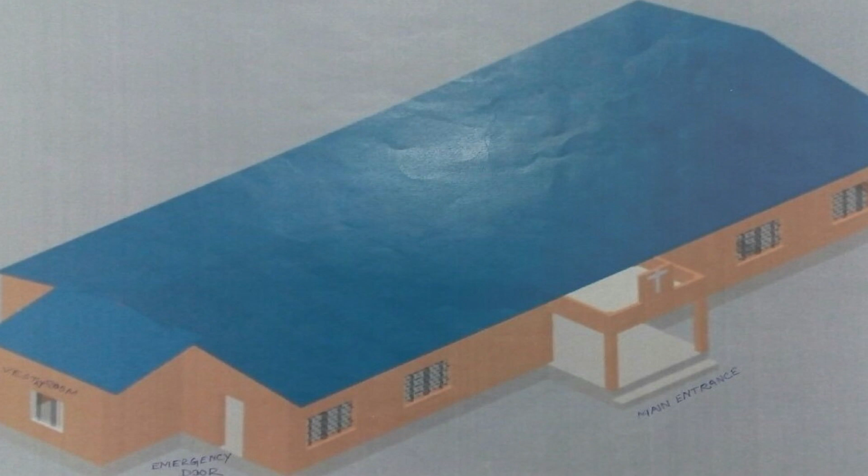Reverend Sebastian and the church secretary Shubhabroto Das came to my office with pictures of the church, a shed created in 1947 for a small congregation of 100 people. The congregation had now grown to 800 and the shed was crumbling apart. A visit to the site revealed that restoration was not feasible. They were keen on a new building and already had a drawing of a new shed, which they didn't want at all. Although it fit their size and budget requirements, they were not happy.

The budget for a church project is determined by the donation collected by its congregation. If the congregation collects 10 lakhs, the diocese can assist them with 30 lakhs more. And this budget of 40 lakhs is all they had for their proposed church, an area of 3,600 square feet in the final plan.

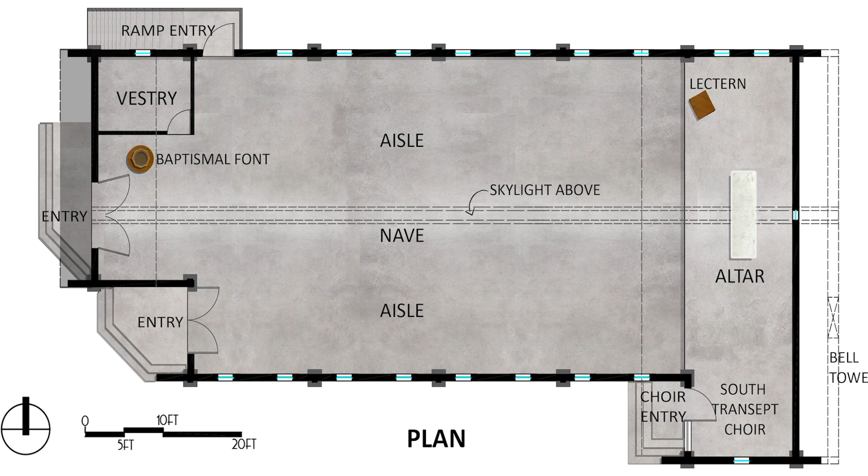The building was conceived in three parts: the entrance vestibule, which also housed the vestry and the baptismal font, the main congregational area, and the altar with a lectern and a south transept for the choir. These three parts were also reflected in the form of the building, which was designed as a series of slopes. These progressively rose from the west to the east.

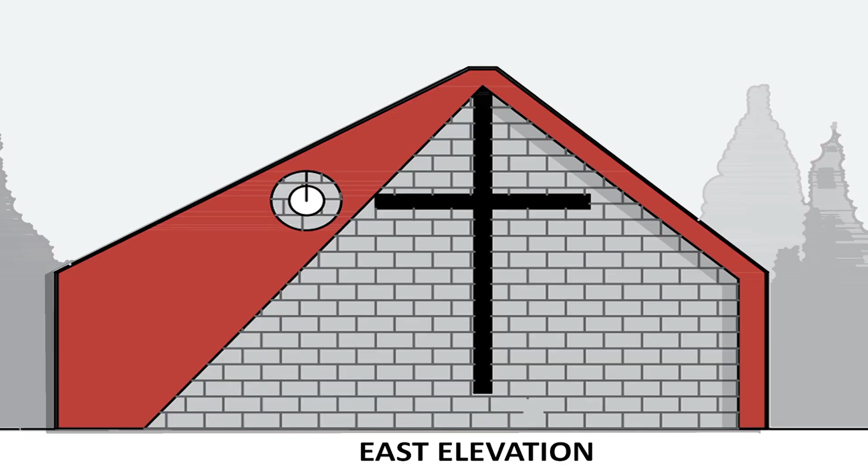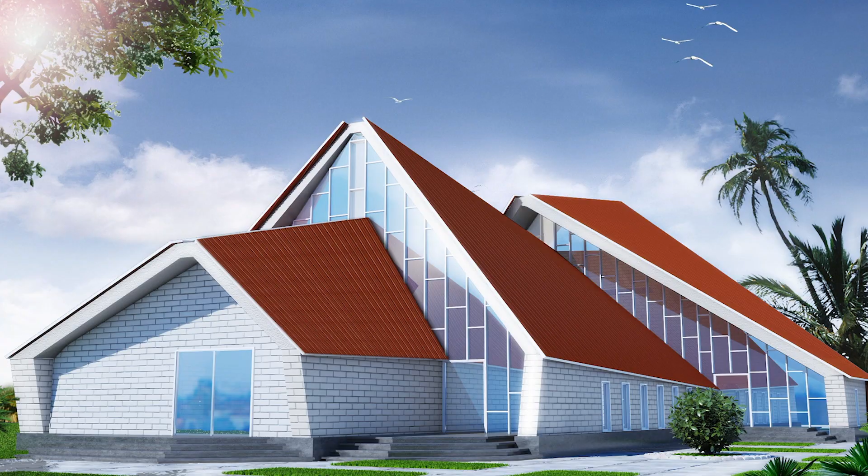The east end culminated in a large glass cross on the gable end to backlight the original crucifix at the altar. This was done to get the morning rays into the church, which was possible only because the east was totally open, being occupied by the Douglas Ground and the wide expanse of Diamond Harbour Road. Another reason for creating this angular roof structure was that these slopes would be visible from the overhead rail line in the future.

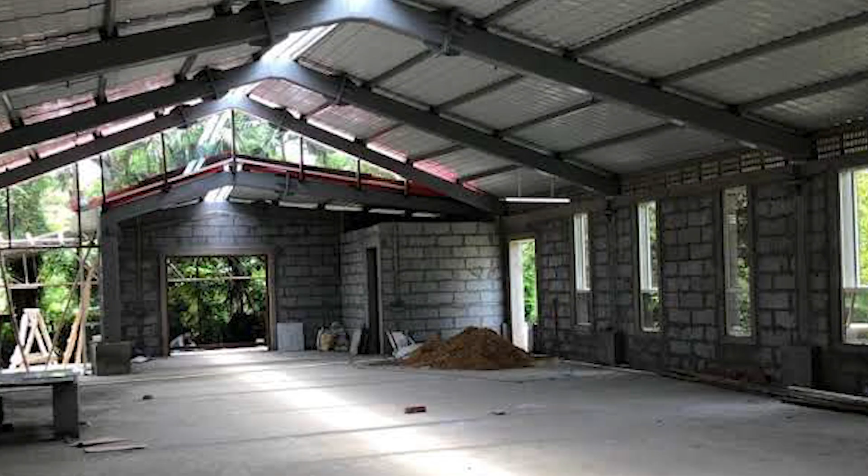In this design of a contemporary church building, we replaced the original bell tower with a niche in the gable wall so that it could house an electric bell. Now, the real challenge was to meet their aspirations within their budget. A steel structure was designed with a narrow skylight at the ridge of the roof. The height, span, and budget could only be met with steel and GI sheeting.

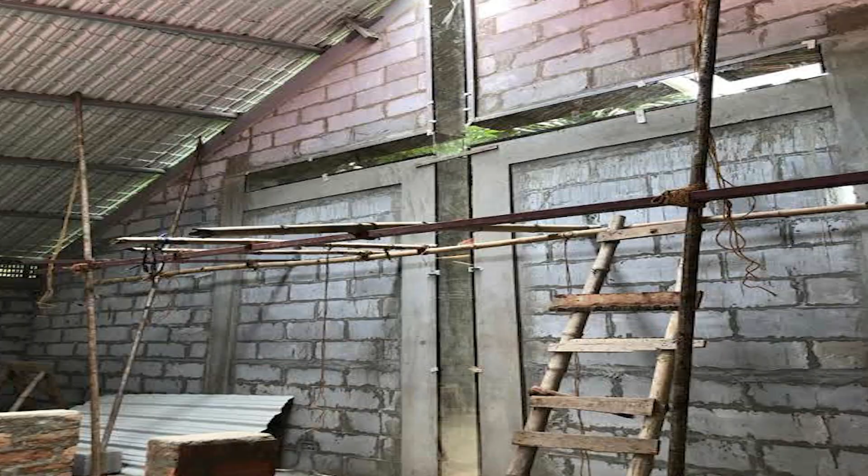Fly ash bricks were used as a sustainable option to build the walls at the eave ends of the structure. The gable ends were created with aluminium frame and glass structures to achieve the height at a minimal load and cost. Natural lighting inside the church was controlled by the narrow skylight, which ran along the length of the nave and culminated in the glass cross at the altar.

Now, southern breeze is vital to the flow of ventilation in Kolkata. The narrow long windows on the north and south walls were designed to facilitate the breeze flowing through the space and provide relief from the constant humidity. Since we were working with GI sheets on the roof, we were worried about the internal temperature in summer.

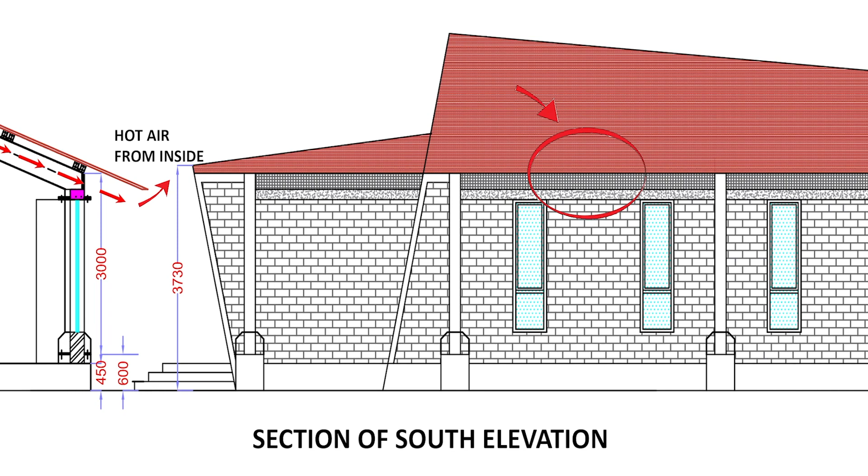We planned for a secondary roof with bamboo below the GI roof with a tiny slit along the length so as to create an air channel of hot air rising up and going out through the air gap and the vents provided on the eaves, which would then naturally cool the church. This secondary roof is yet to be built due to lack of funds.

The flooring was designed in IPS cement finish, but it was later completed in tiles and marble as funds came in. The church also received an antique lectern and a baptismal font from the CNI. The entire process of building the church was extremely challenging, but when the building was inaugurated on 6 December 2019, it was extremely satisfying to see that the image of the facade was on all the invites, the hymn books, the mementos, gifts, and even the cake.

My learning from this project is that the church is not just a building. It is the collective faith and aspirations of its congregation.